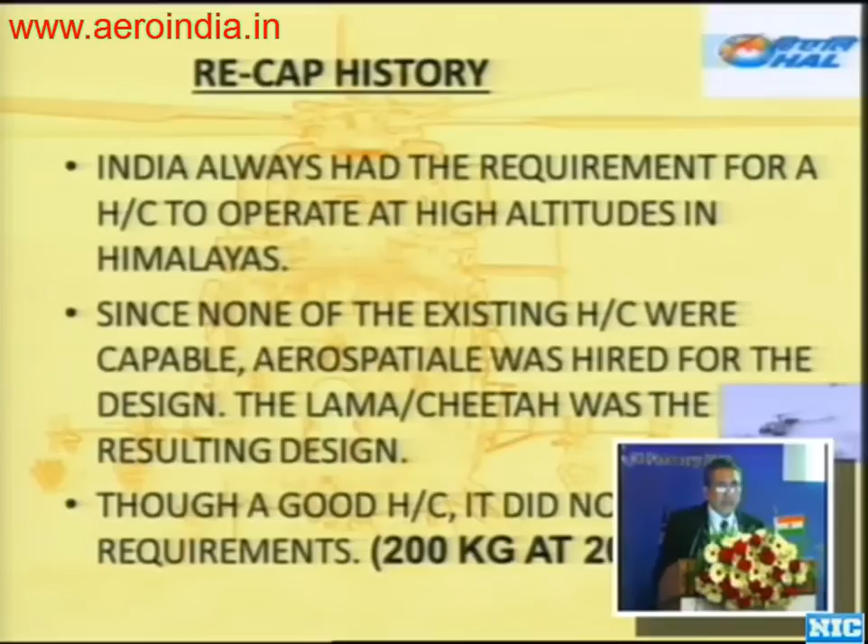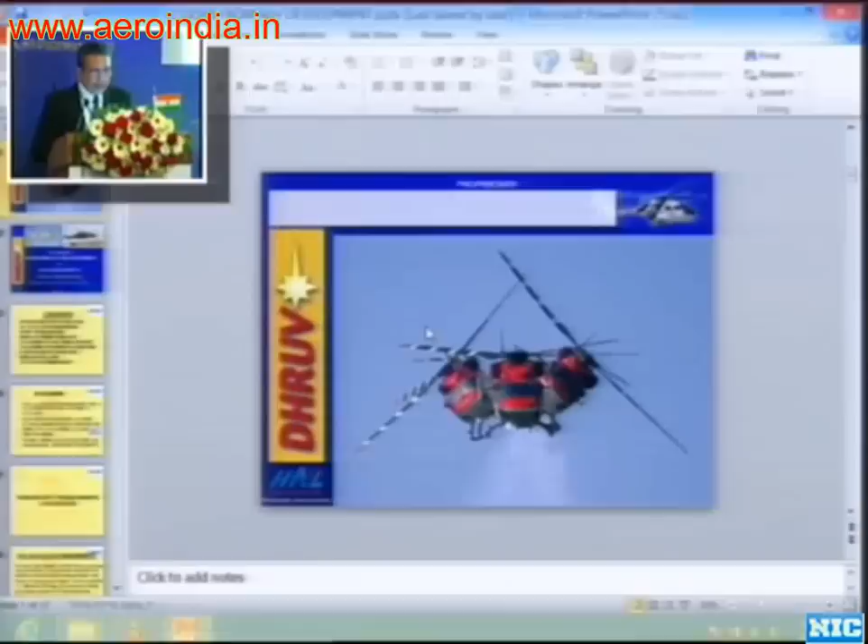Now, to recap the history, India always had a requirement for a helicopter to operate at very high altitude in the Himalayas. Since none of the helicopters were capable, Aerospatiale was hired by the government of India to design one, and the Lama/Cheetah was the resulting design. Now, the Cheetah is an excellent design. However, it did not meet our specific requirements of carrying 200 kg at 20,000 feet in OGE configuration at ISA plus 20. Now, as usual, something is not working, so I'll just exit and play for you.

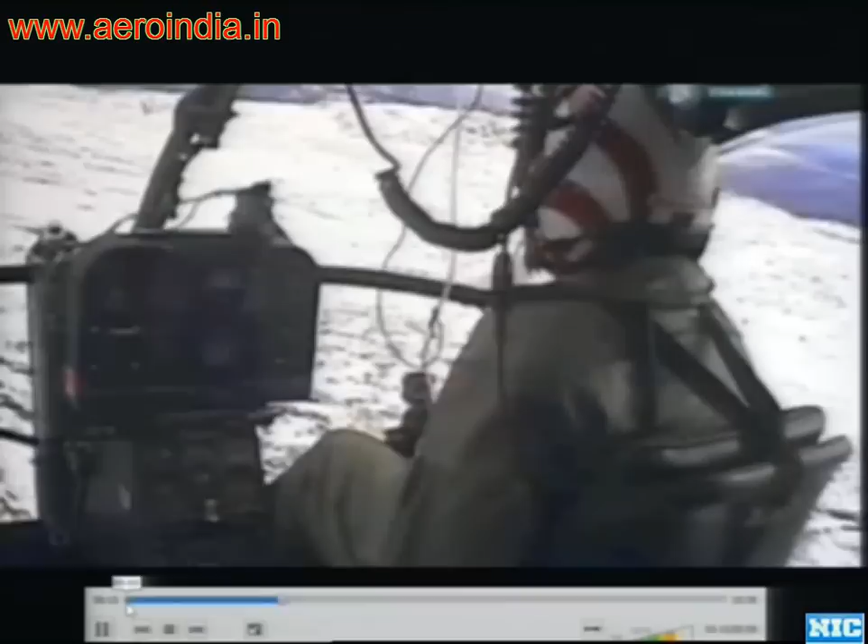It is the Lama. Of course, it's the highest flying helicopter ever. In 1972, the aircraft actually flew to an altitude of 41,000 feet. The Lama was originally designed for the Indian Air Force to defend their high-altitude borders in the Himalayan mountains. The Lama is amazing because it does many things that the ordinary helicopter cannot do. Most helicopters operate efficiently up to around 8,000 to 10,000 feet, fairly close to the ground. The Lama, however, can operate very efficiently in the 20,000 feet altitudes.

To operate at such high altitude, the Lama had to overcome the laws of physics. The problem with flying at altitude is a lack of oxygen molecules in any given square foot of airspace. The higher you go, the thinner the air gets, and there's less and less for the rotor blades to bite into, less air for the engine to breathe.

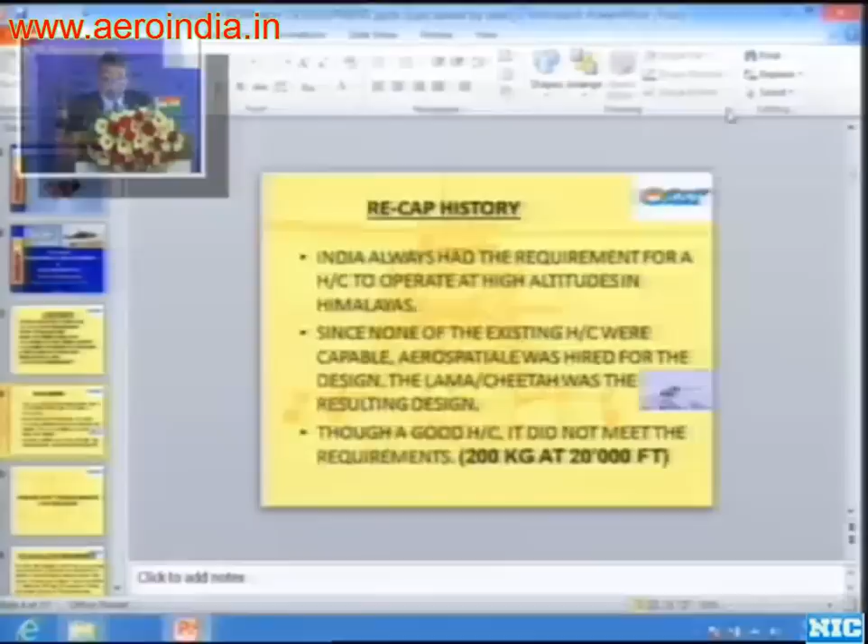Okay, now getting back to the presentation, we'll start with the first issue which we had, which was with the ASR, the requirements generated by the air staff requirements, or the naval or general staff requirements. So if I remember right, you were in the ASR.

Now the ASR and the NSR were released in 79 and had a very ambitious requirement of using a common base platform for performing a sweeping range of roles. One of the roles which was given was to take off from 20,000 feet in out of ground effect configuration at ISA plus 20 degrees with a payload of 200 kg and a large fuel load of over 2 hours endurance. Realistically looking, there is no helipad in the country at 20,000 feet from where you could launch such an operation.

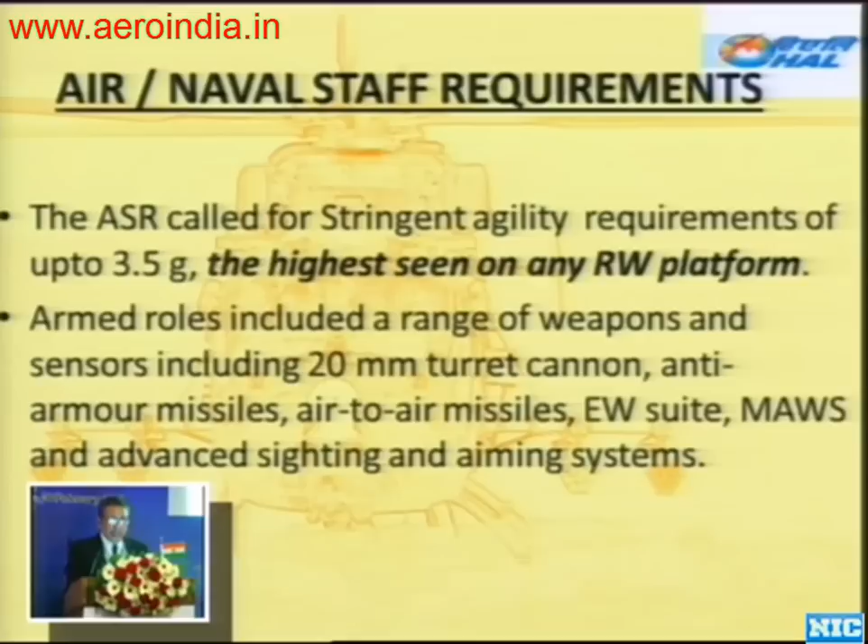Now the ASR also called for stringent agility requirements of up to 3.5 G, the highest seen on any rotary wing platform. The armed roles included carriage of weapons, sensors like 20 mm gun, cannon, anti-armor missiles, air-to-air missiles, EW, MAWS, and advanced sighting systems.

Now the naval roles included search and rescue, troop carriage, anti-submarine warfare, anti-ship, anti-surface vessels, and the weapons included torpedoes, Exocet, depth charges; sensors included dipping sonar, surveillance radar, sonobuoys, and the magnetic anomaly detector. Now the naval requirements were too large for a 5.5 ton platform.

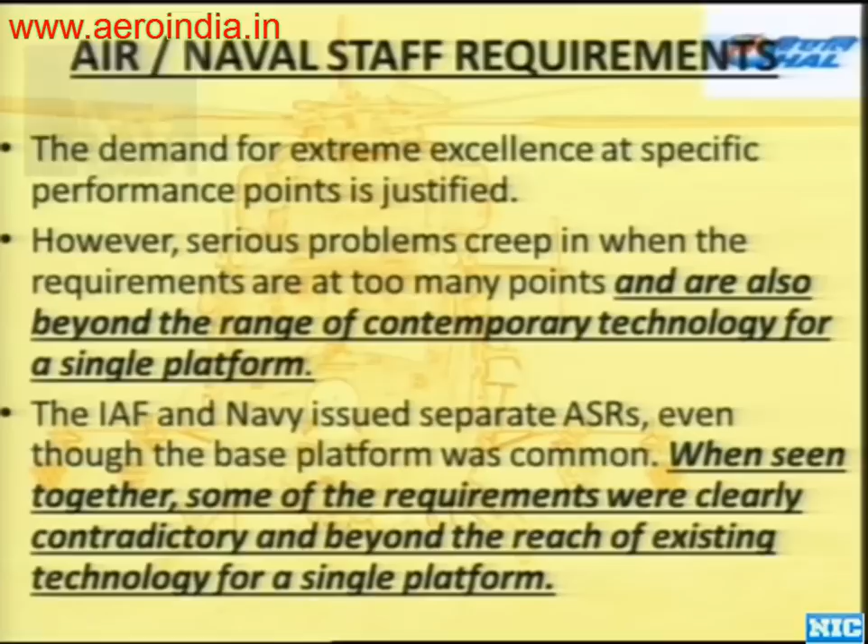While we agree that extreme excellence at certain specific points is justified, however, serious problems creep in when the requirements are at too many points and are also beyond the range of contemporary technology on a single platform. The IAF and the Navy issued separate ASRs, even when the base platform was common. When seen together, some of the requirements were clearly contradictory and beyond the reach of existing technology for a single platform.

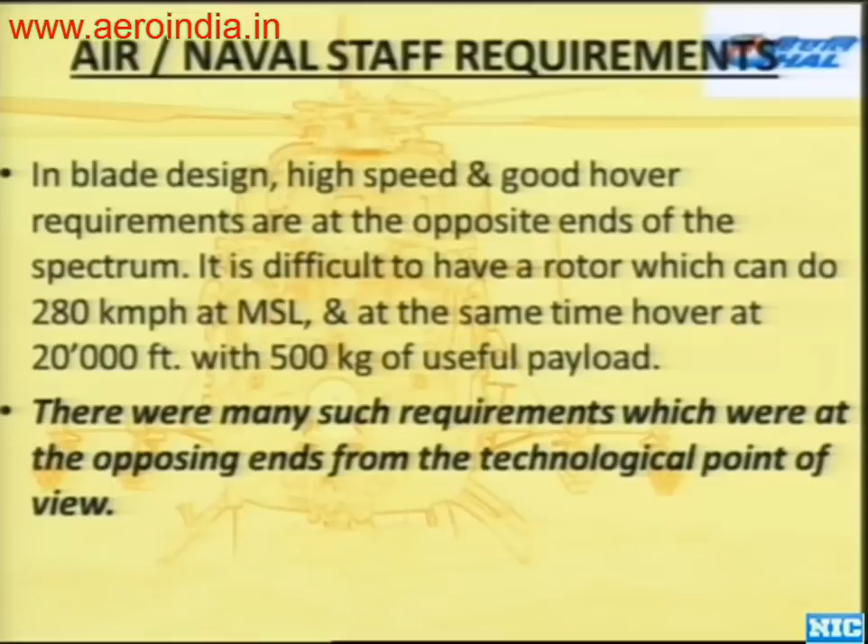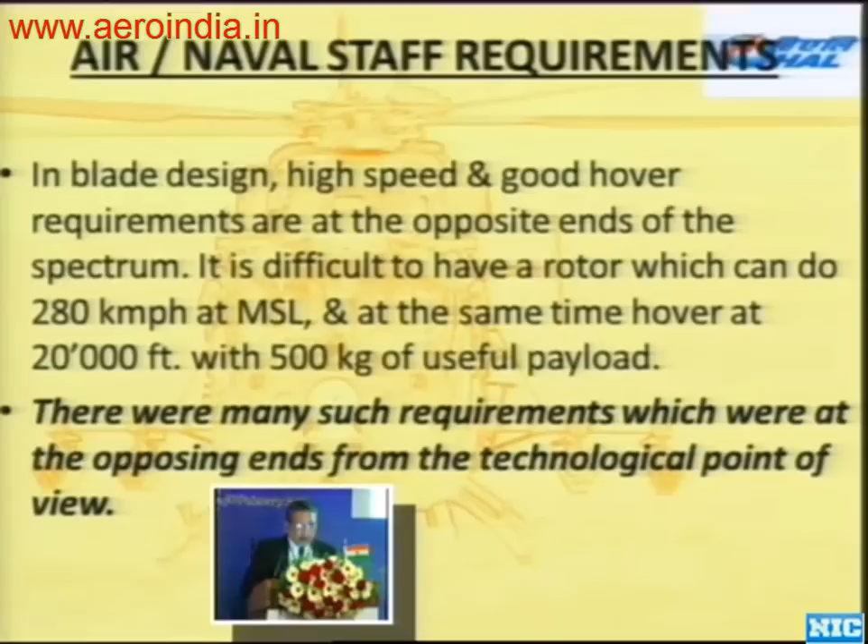Now, in blade design, high speed and good hover are at either end of the spectrum. If you want a helicopter to clip at 280 kilometers, you cannot expect it to hover at 20,000 feet in out of ground effect, in ISA plus 20, okay, and carry a huge payload. Now, there were many such requirements which were at the opposing ends from the technological point of view.

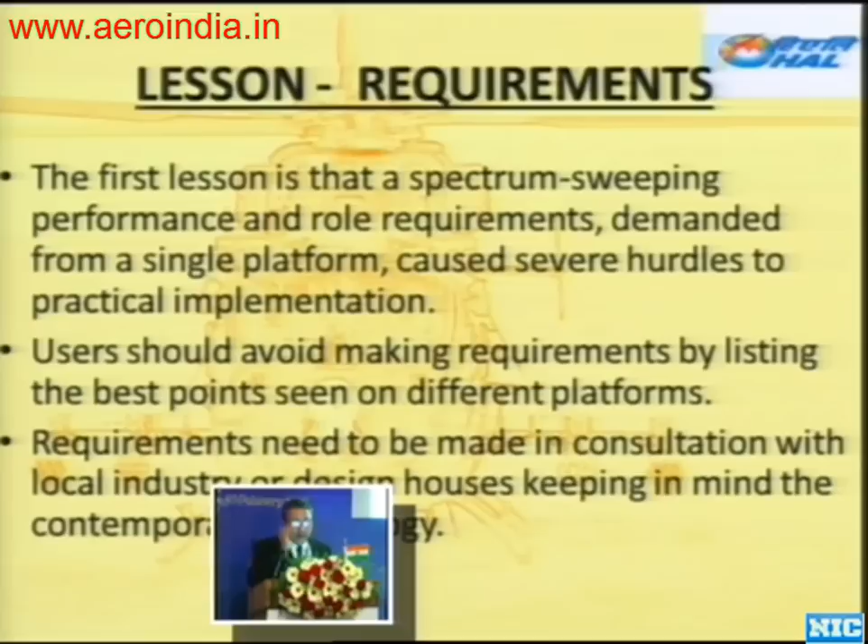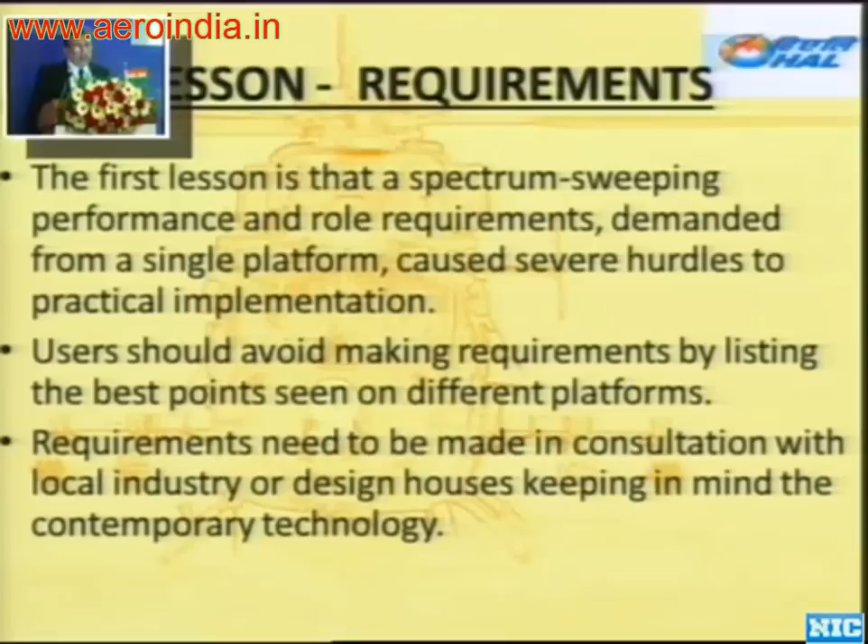Now, coming to the first lesson is that spectrum sweeping performance and role requirements demanded of a single platform caused severe hurdles to practical implementation. Users should avoid making requirements by listing the best points seen on different platforms. And the requirements need to be made in consultation with local industry / design houses, keeping in mind the contemporary technology.

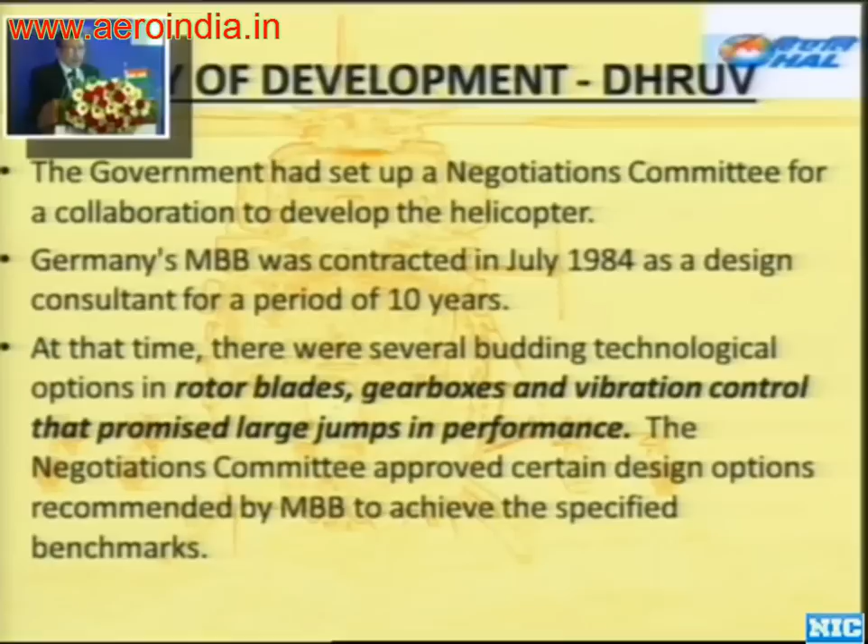Now we go on to the next issue, which was that ours was the first time project, Dhruv, and the number of new concepts which we tried on Dhruv. Just to go briefly into the history so that you can understand better. Now the Government of India had set up a negotiation committee for a collaboration to develop a helicopter. Germany's MBB was contracted in 1984 as a design consultant for a period of 10 years. At that time, there were several budding technological options in rotor blades, gearboxes, vibration control that promised a very large jump in performance. The negotiations committee approved certain design options recommended by MBB to achieve the specified benchmarks.

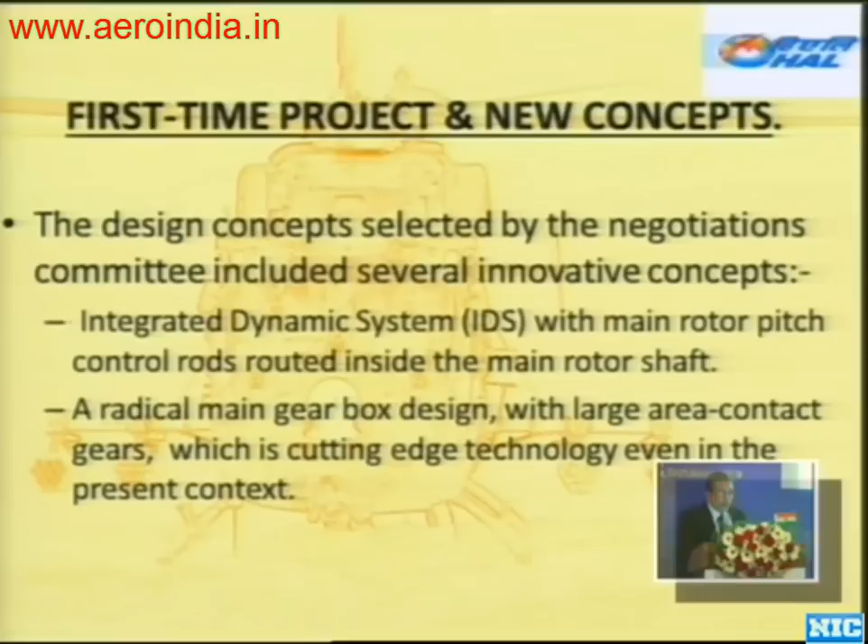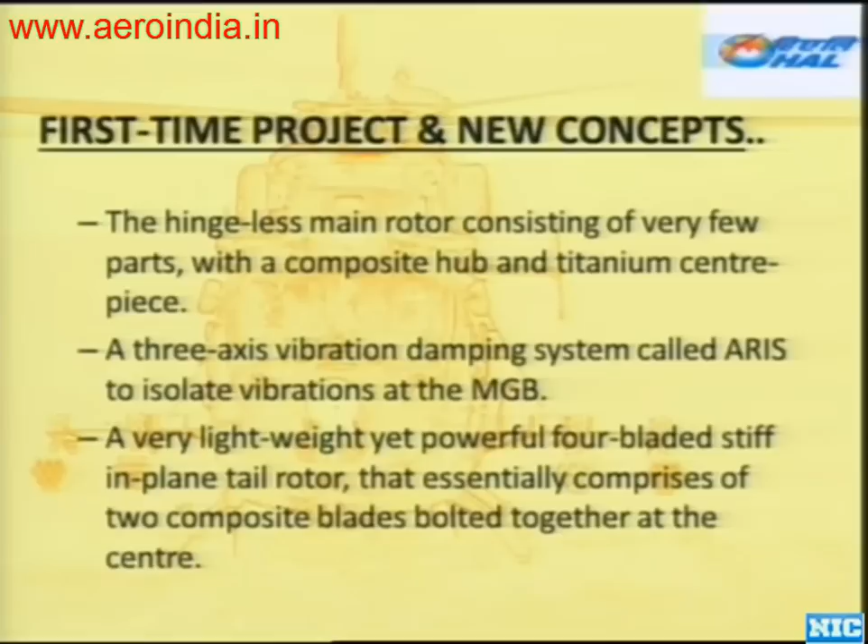Now, the design concepts selected were very innovative concepts. Things like integrated dynamic system, where the main rotor pitch control rods were routed inside the main rotor shaft. The heart of the helicopter, which is the main gearbox, was a radical design with large area contact gears, which is cutting edge technology even in today's context. A hingeless main rotor system consisting of very few parts with a composite hub and a titanium centerpiece. 3-axis vibration system called ARIS to isolate the vibrations of the MGB. And a very lightweight yet powerful 4-bladed stiff in-plane rotor that comprises 2 composite blades bolted together at the center.

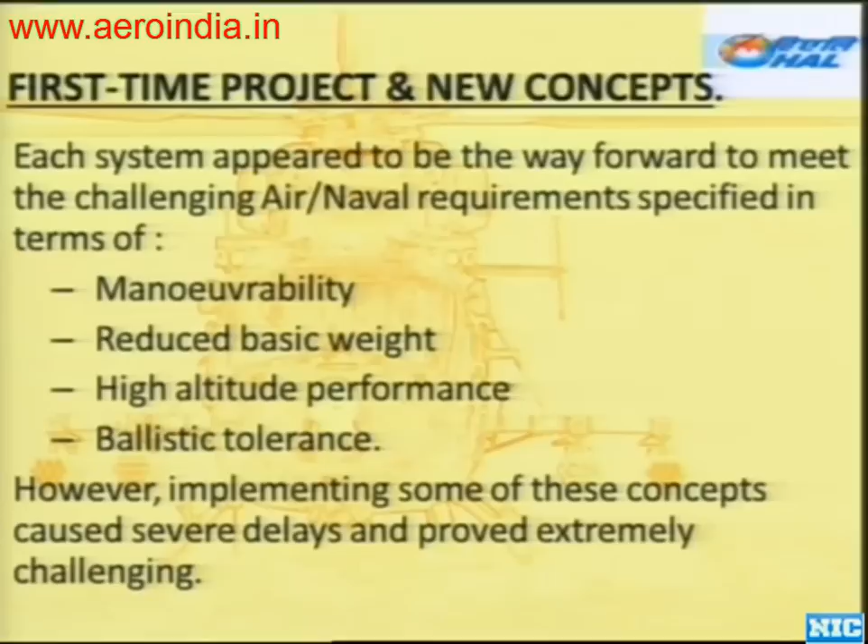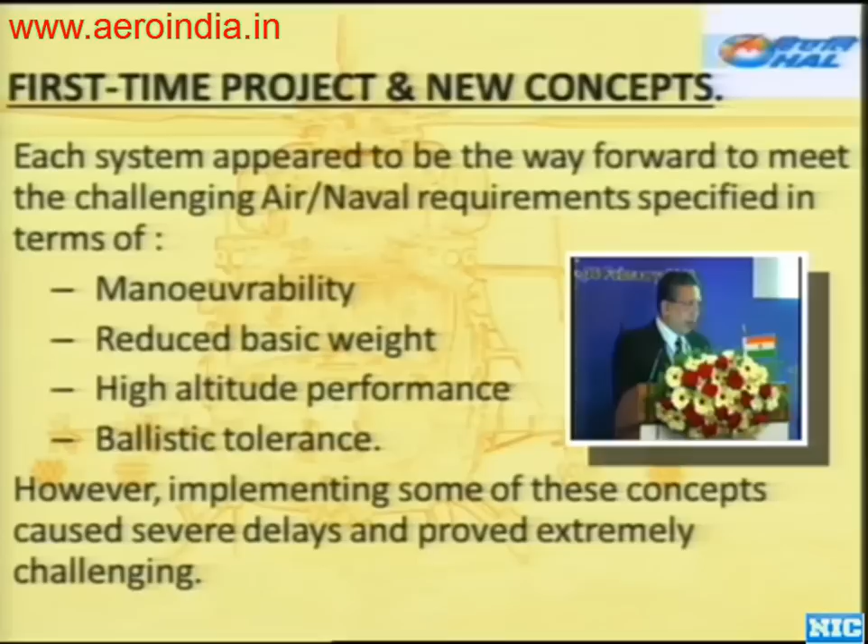Now each system appeared to be a way forward to meet the challenging requirements given by the Air Force and the Navy at that time. And it promised maneuverability, reduced basic weight, high altitude performance and ballistic tolerance. However, implementing these concepts was a big challenge.

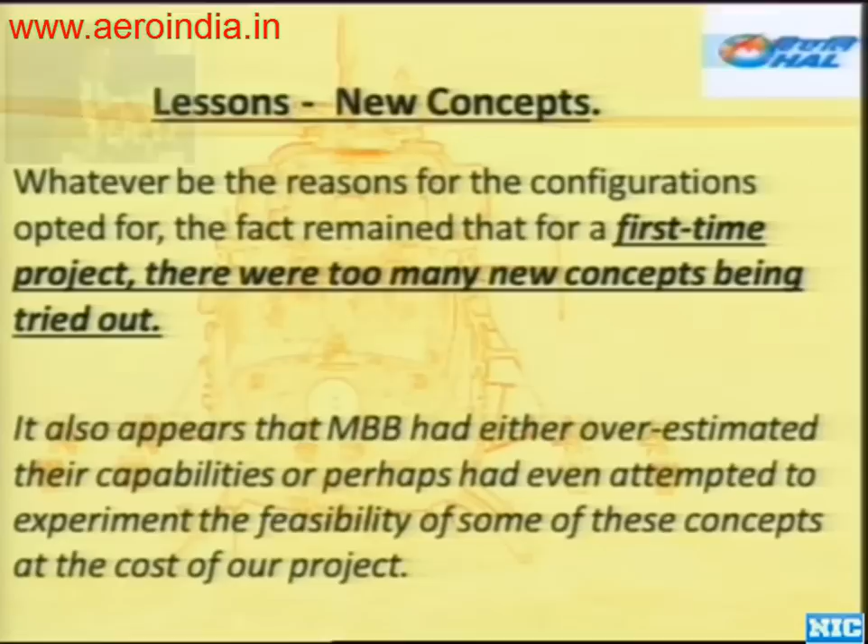So now we come to the lessons. Whatever the reasons or configurations opted for, the fact remained that for a first-time project, there were too many new concepts being tried out here. Sometimes it also appears that MBB had either overestimated their capabilities or perhaps even attempted to experiment the feasibility of some of these concepts at our cost.

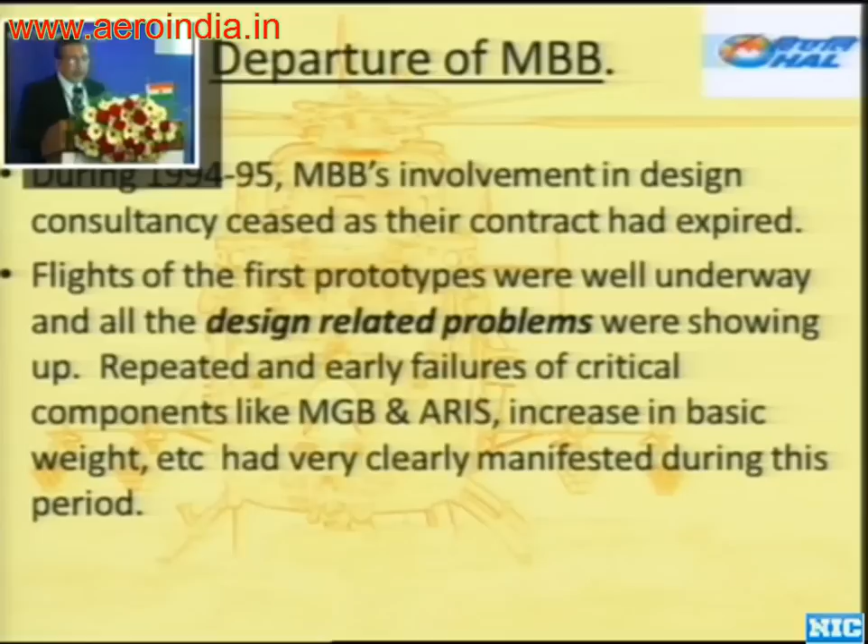Now we come to the next issue, which is the premature exit of the consultant. In 95, MBB's involvement in design ceased as their contract had expired. Now, the forces which were at play there refused to extend the contract. The flights of the first prototype at that time were well underway, and all the design-related issues were showing up. Repeated and early failures of critical components like MGB and ARIS, increase in basic weight, etc. had clearly manifested during this period.

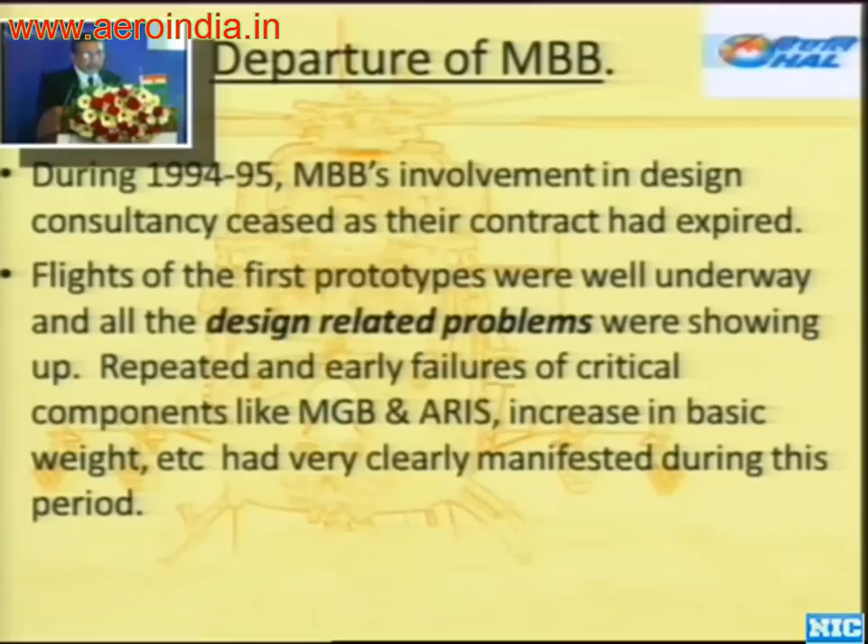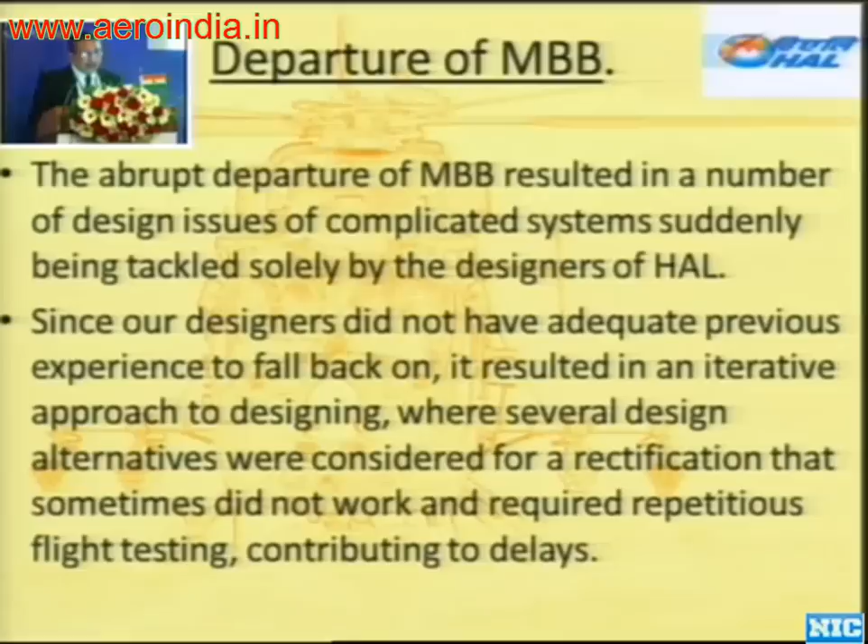The departure of MBB resulted in a number of design issues of complicated systems suddenly being tackled solely by HAL designers. Now, since our designers did not have adequate or previous experience to fall back on, it resulted in a very iterative kind of approach where a number of alternatives were tried out, which led to repeated test flights and contributed to large delays. Now the next lesson which we come to is, if we have a consultant, the consultant needs to be held accountable till the design is proven and the helicopter/aircraft enters production and matures.

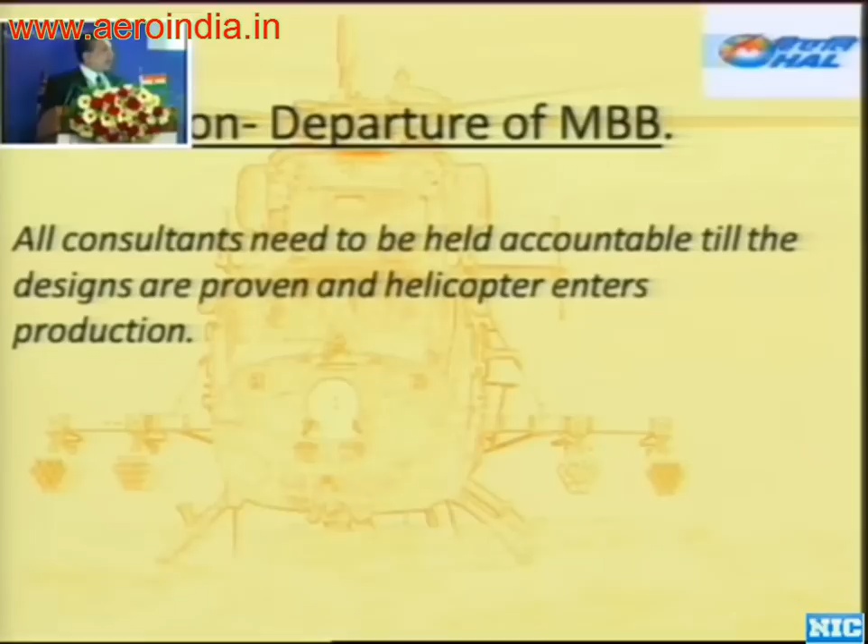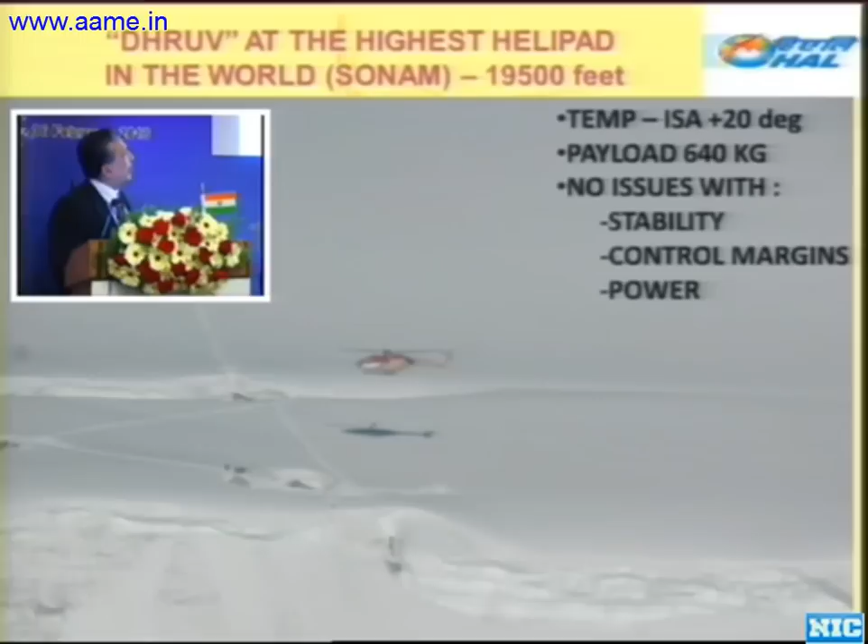Okay, this slide summarizes our large effort at meeting the very stringent ASR. Here is a photograph of a Mark III somewhere in 2009 landing at a helipad called Sonam, which is at 19,500 feet, when the temperature was ISA plus 20, and the payload was in excess of 640 kgs. We never had any issues with stability, control margins, or power. And no helicopter in the world can meet these requirements, of which I am very sure.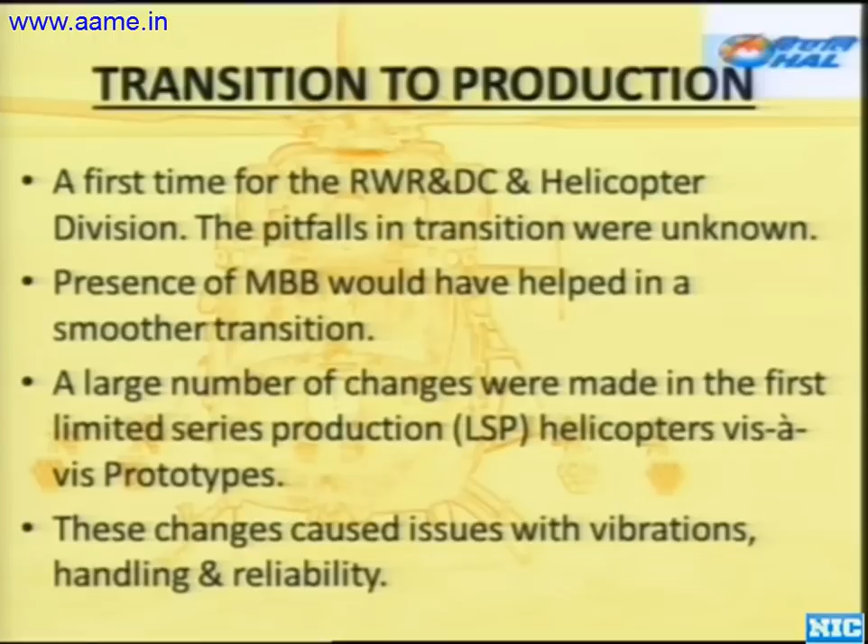Okay, now we return back. One of the lessons was when we transited from the prototype to the production, there were a lot of issues which reared their head. First of all, it was the first time for both RWRDC and the helicopter division. The pitfalls in transition were unknown. And I feel the presence of MBB at that time would have helped in a much smoother transition to production.

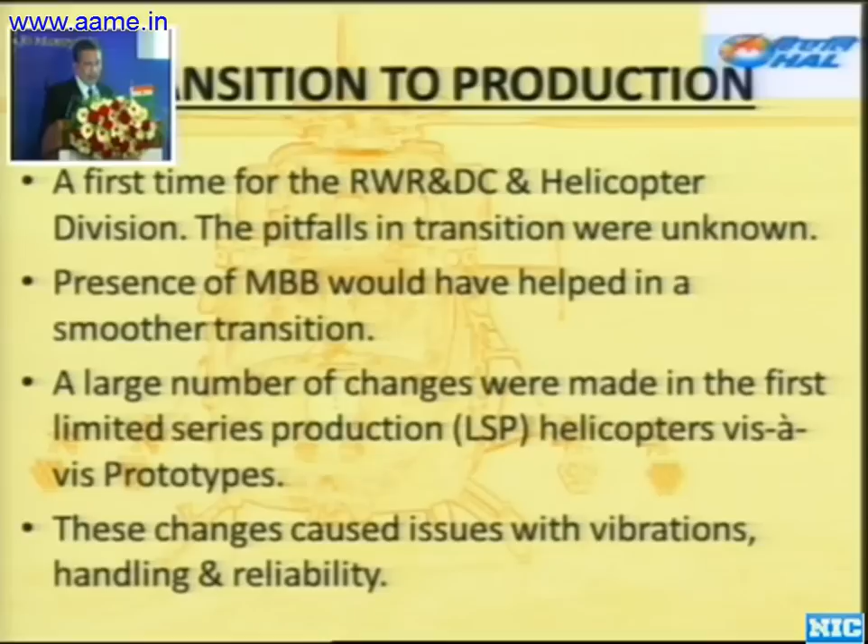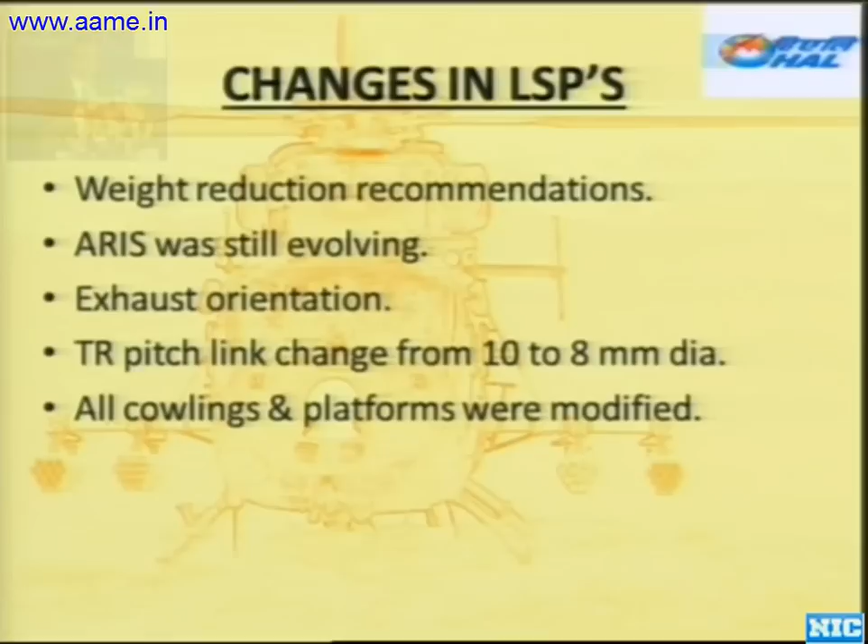There are a lot of changes which we brought, like I told you. One was weight reduction; recommendations of the weight reduction committee were incorporated on the LSPs. Now this brought in a lot of changes, a lot of weight was reduced all over the aircraft, which created a lot of problems. The ARIS, like I told you before, was still evolving while the helicopter was entering production.

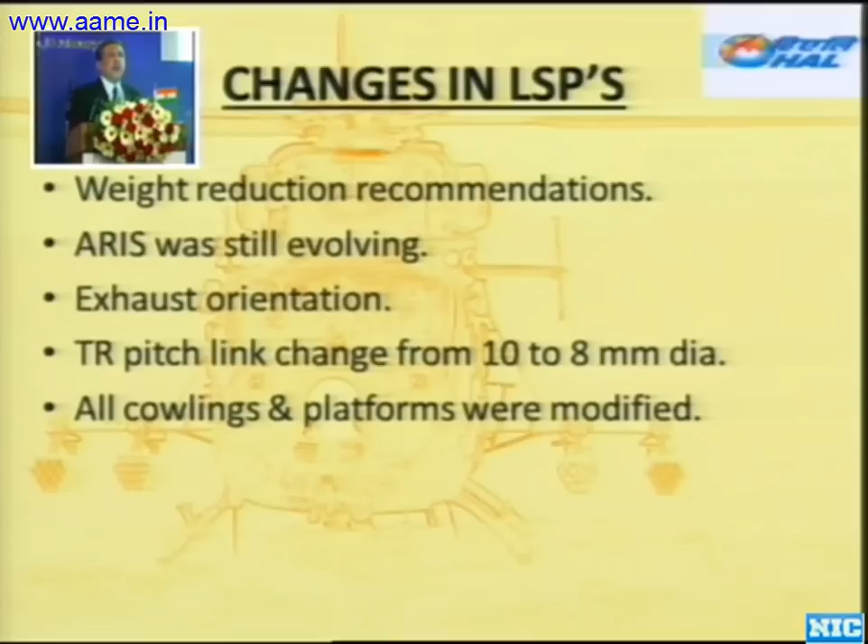The exhaust orientation: most of the flying was done with the exhaust oriented in a certain way. However, we had an issue with vertical oscillations, so in a desperate attempt to get rid of the problem, we had to change the orientation of the exhaust. Tail rotor pitch link was changed from 10 to 8 in a weight reduction effort. However, we had to get back to 10. A lot of cowlings and platforms were modified. Now, this is the lesson: the production helicopter needs to be of the same SOP as the last prototype tested.

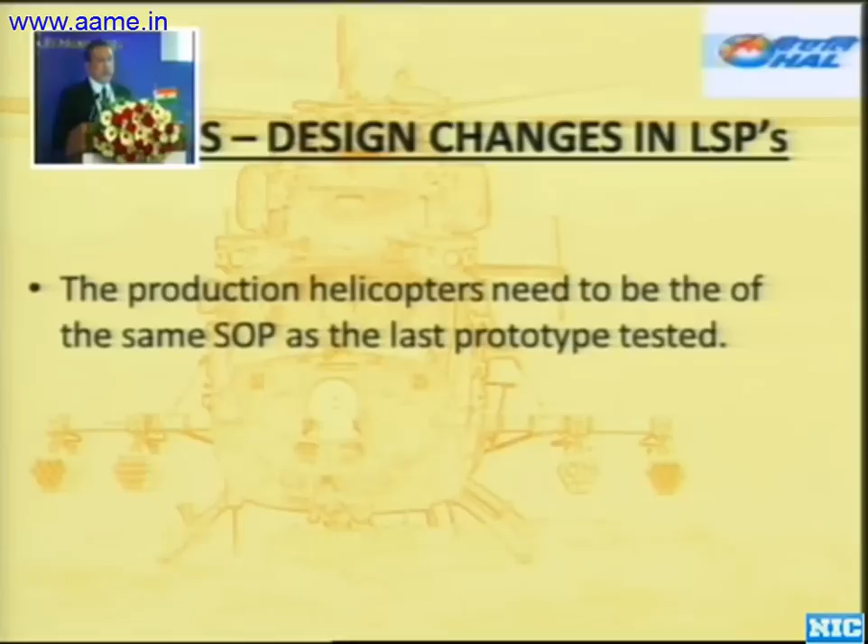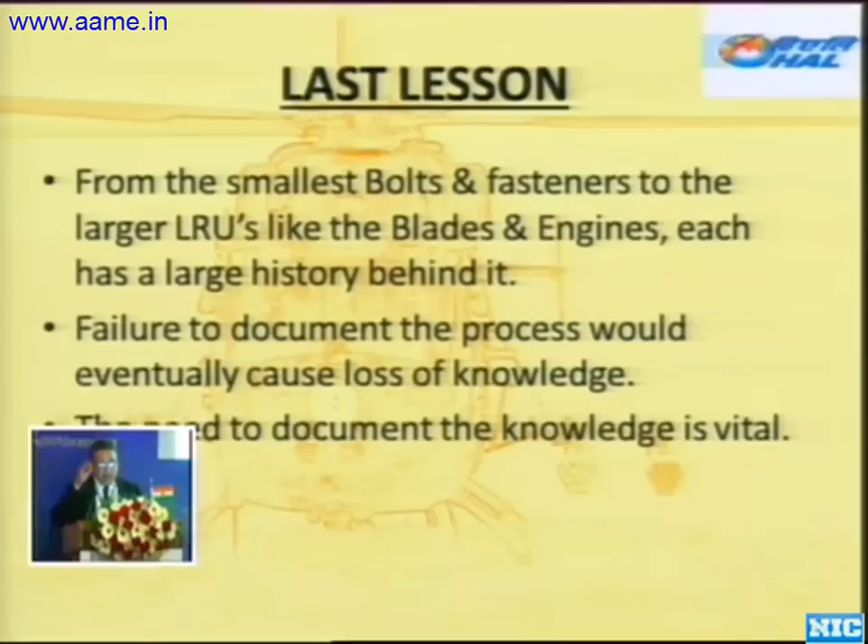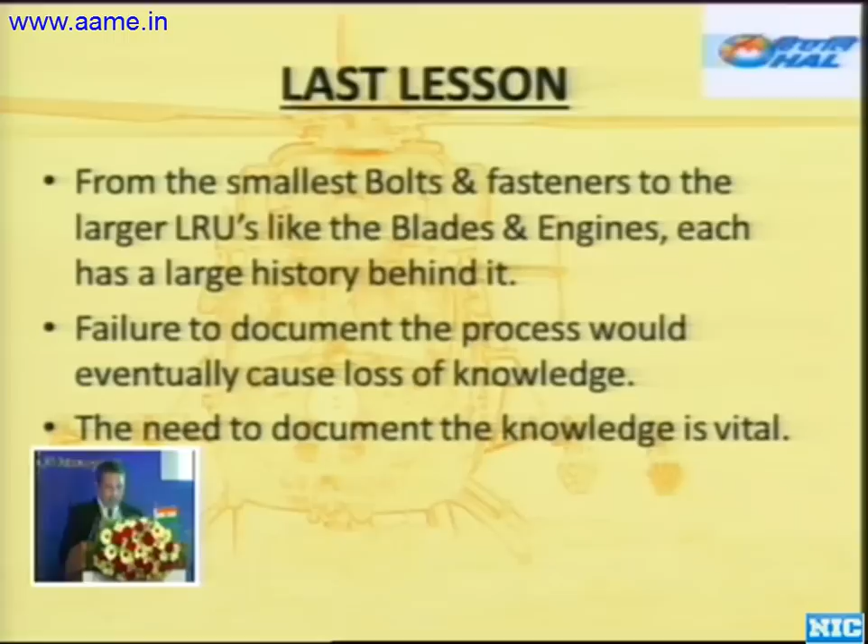Coming to the last lesson. Now, remember, like I told you in the beginning, from the smallest of the bolts or fasteners to the largest LRU, like the engine or the blade, each has a very long history behind it. Now, if you do not document the process, we will eventually lose the knowledge. And we were slightly late in commencing our documentation, which we have corrected now. But the need to document is vital.

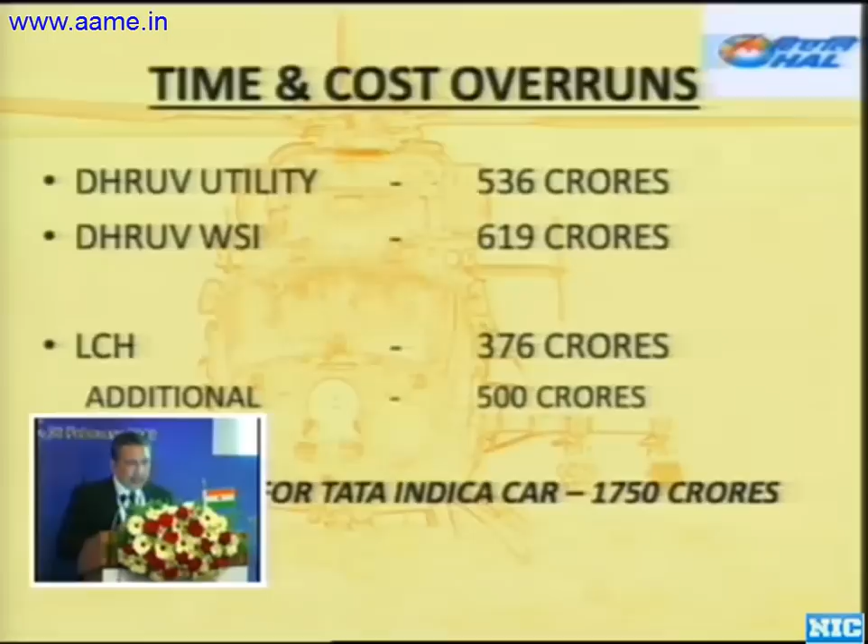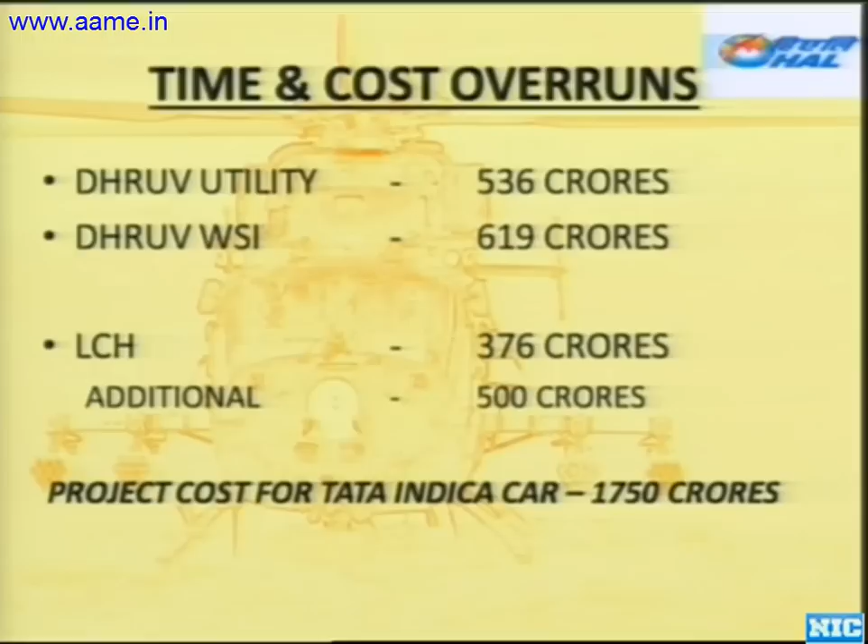Now, we have always been accused of time and cost overruns. Just to get an idea of the time and cost overruns, the Dhruv utility and the Dhruv WSI combined were developed under 1200 crores. Okay, and the LCH is 376, and we have asked for an additional 500 crores, whereas the cost of Indica, which falls in the same time, was 1750 crores. So I don't think that is correct.

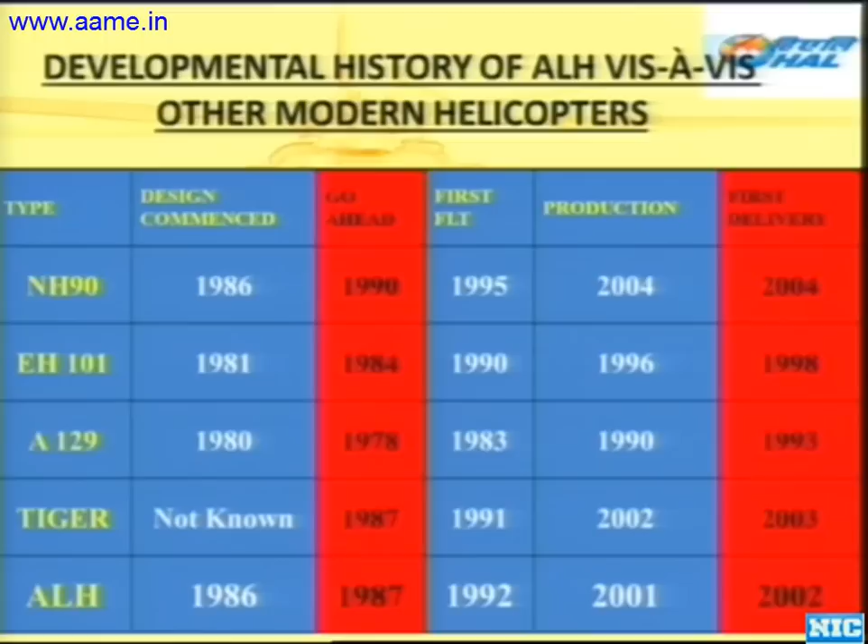Now let us go on to the time. So what we did is we collected data of contemporary helicopters being developed during that period. Now of all the helicopters, if you see from, say, go-ahead to delivery, they all fall into 14 to 16 years as the time to develop a helicopter. That doesn't change. So we are at 15, which is well within the global average.

Now, coming to applying the lessons learned. Have we applied the lessons learned in the projects which we are undertaking now? The answer is yes, and I'm glad to say that in the LCH, starting from the drafting of the requirements, what we learned previously have been applied.

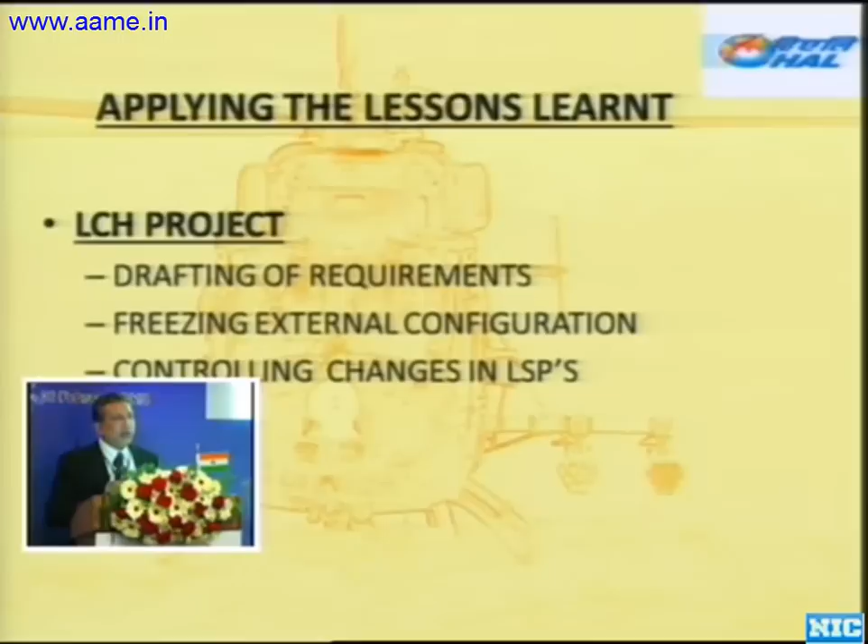Our approach to flight testing has been such that we decided to first freeze the external configuration, even at the extent of keeping the prototype on ground for a long period of time, so that we are able to run through the tests in a comprehensive way and faster.

And lastly, controlling the changes in LSP. We started off with TD1. There were issues with TD1, and there were a number of changes we wanted, so the design process had started. Each change requires a minimum of about 8 months for it to find its place in the helicopter.

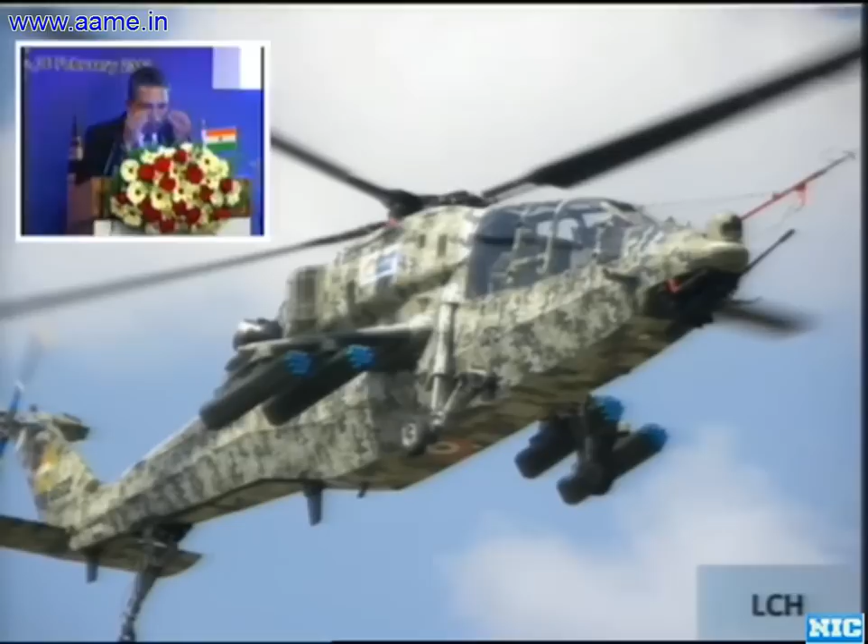The aim is to finally reach a configuration that would be the final production variant, with absolutely no changes between the TD3, which is coming up end of this year hopefully, and the LSPs.

With that, I have come to an end. Let's hope this plays... no. I'm open to questions.

Any questions for Wing Commander Pillai?

You are all welcome to see it performing in the air show starting from day after tomorrow.